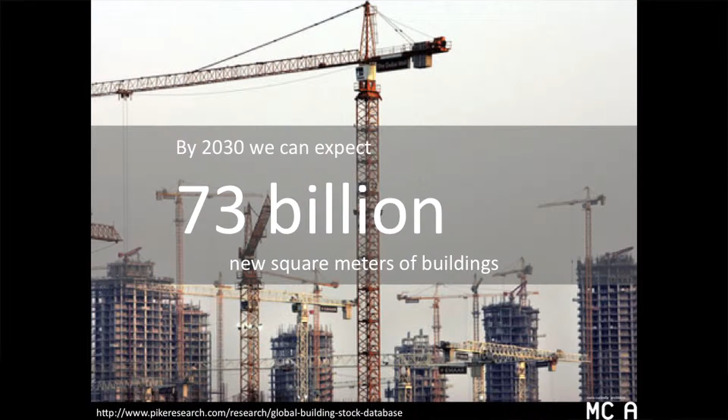But the most important thing is that by 2030, we can expect another 73 billion new square meters of buildings. And these numbers are really huge. You can imagine that if we continue to build as we do today, it will be a very huge problem. We will reach the no-return point.

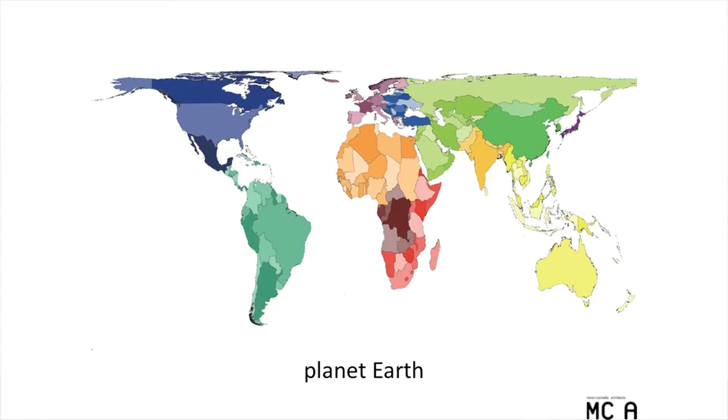So, the importance of resources. Today, there are very relevant issues, for example energy, water, waste. But tomorrow they will be extremely relevant: energy, water, biodiversity, climate, outdoor amenities. So that's the point where we start to design buildings.

So our vision is responsibility. We have to work in a responsible way to make buildings that consume a lot less energy than what we are doing today.

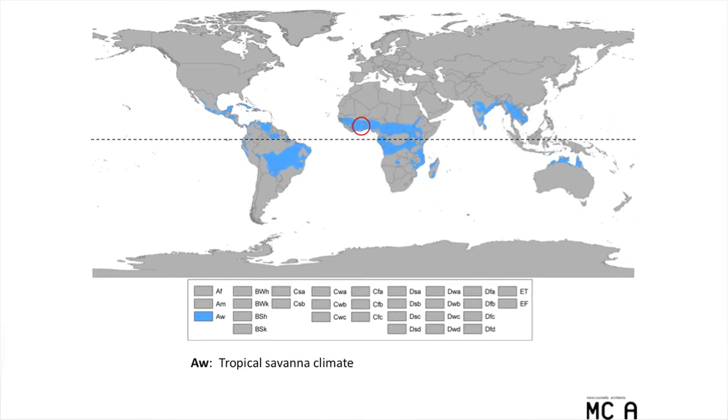This is the location. It's not very interesting, but you know, this is the solution: overhang as a passive cooling strategy.

Normally, the normal way to cool a building is to put in a lot of equipment, close the windows, and add an air conditioning system, and that's how we normally do it. But this is a very simple and easy solution.

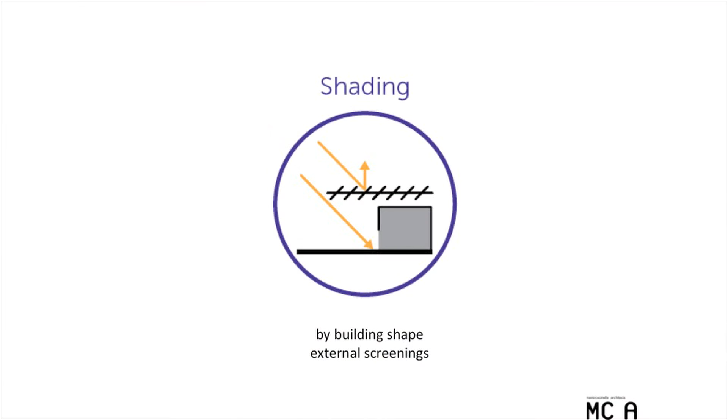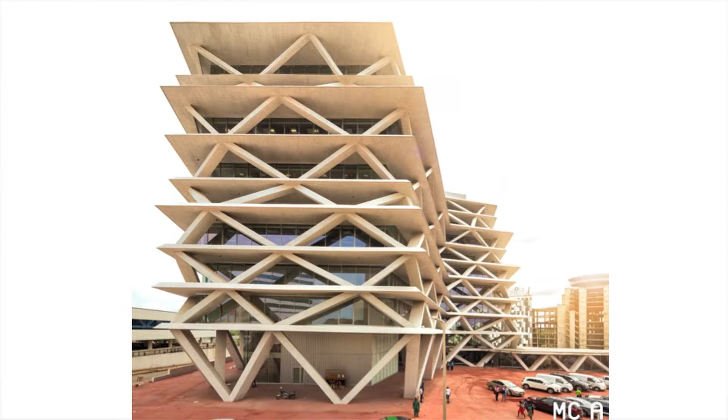This is the building. Now I will show a few pictures of it. As you can see, it's also kind of a very simple and brutal building—just floor plates and a structural diagrid. And the rest is made by the overhang system that screens the facade from the sun.

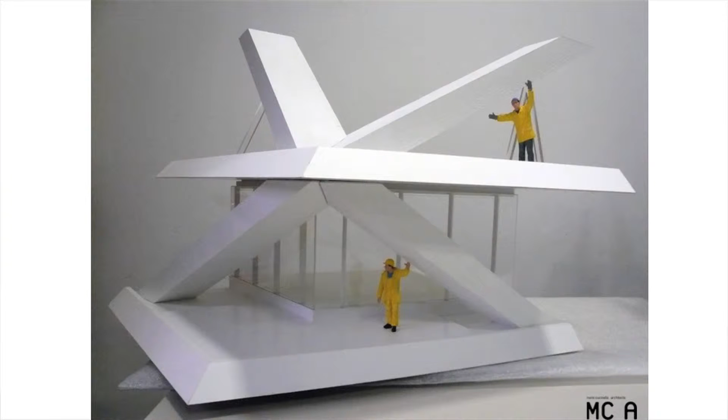And this will reduce a lot the need for energy to refresh the building. So a very simple solution makes the building very efficient and also very beautiful, I would say.

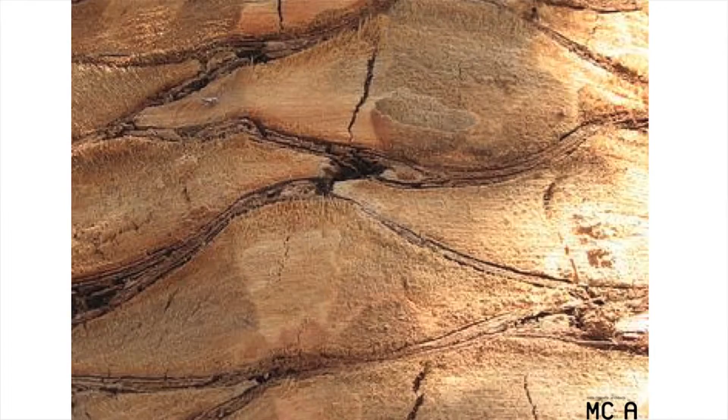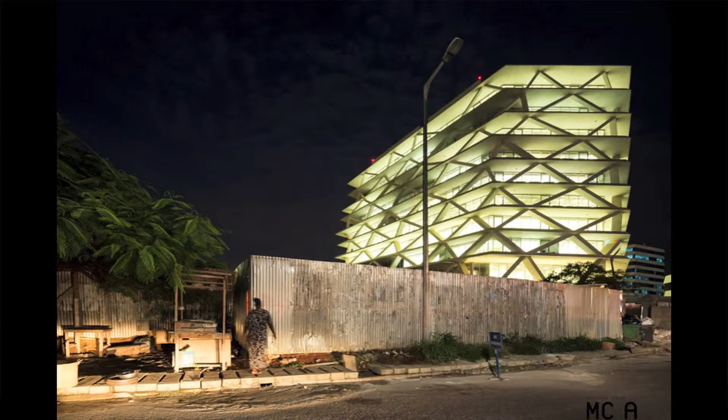So thanks to the overhangs, we can reduce the cooling peak during the day by 50%. And these pictures are just to show that with some computer program, we managed to investigate all the different problems.

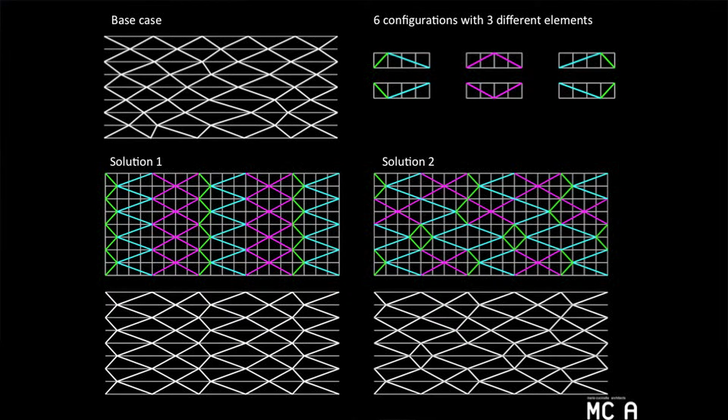This is just optimization of the structure, to minimize the use of material. So through a parametric program, we were able to minimize also the amount of concrete in the building. And it works really, really well, as you can see.

So it's a four-star Green Star certified building. That is a good result for West Africa.

Now I will move to the next project, the Algerian Post and Telecommunication Authority Headquarter in Algiers, Algeria. As always, the first issue is the climate.

Here we are in a hot summer Mediterranean climate, and the principle we used to design the building was shading. We used the tradition of the musharabia, the way Arabic countries shade the interior to keep rooms fresh even when it's very warm outside. That's the building, built starting from that principle.

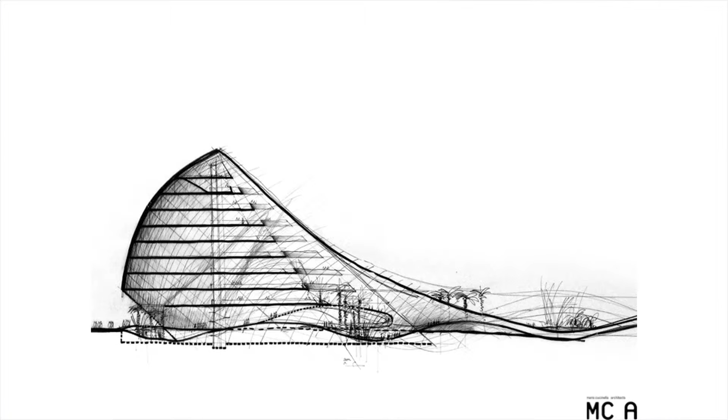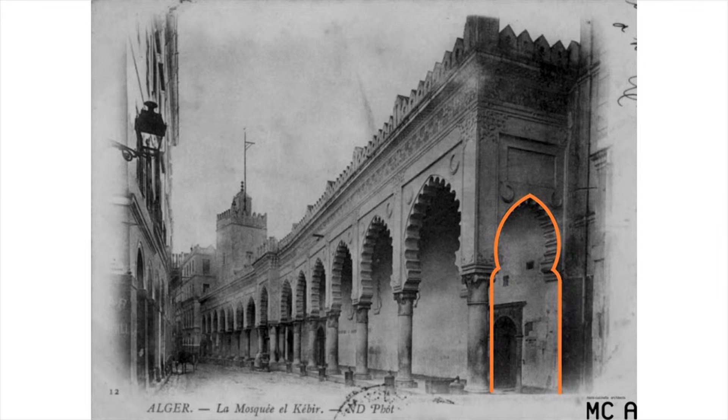In this project, apart from the shading, we also worked a lot with the shape of the building, getting inspiration from the desert dunes and from traditional Arabic arches. As you can see in the next slide, this generates the whole plan and also the facade. Everything is done using this element, which is very strong in Arabic tradition.

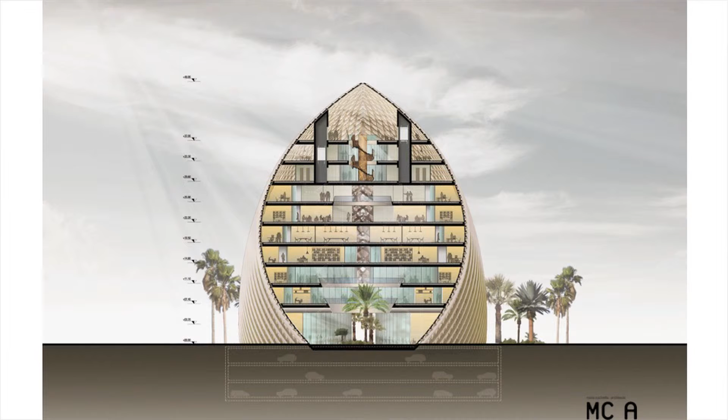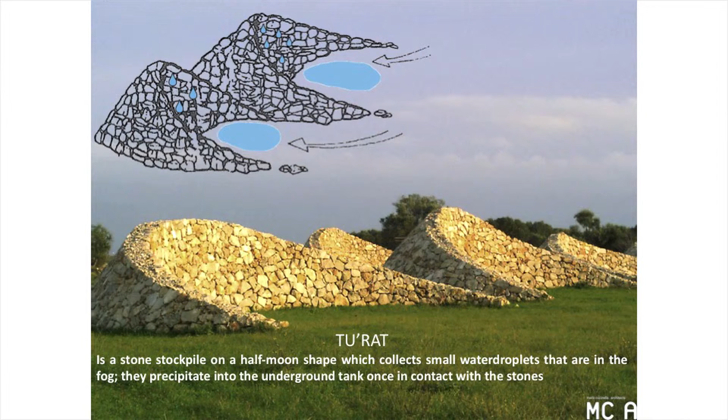This is the section, rendered. It's very interesting because the shape of the building is similar to a tu'rat, a system used in the past around the Mediterranean Sea to collect water during the night. That's exactly how our building works: during the night, cold wind reaches the building from this side, we collect the cold air, and we refresh the building overnight.

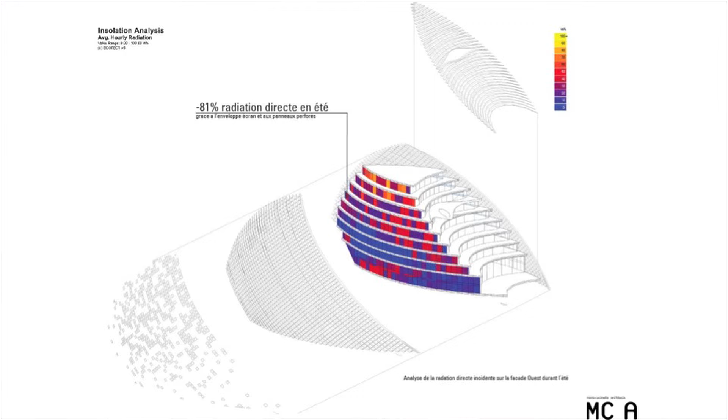There are also other strategies, but time is running fast, so I'll move on. This is the new mashrabiya screen we designed, and these are the solar radiation analyses — the screen is optimized based on the sun's position during the year, so it's not all the same but changes depending on the side of the building.

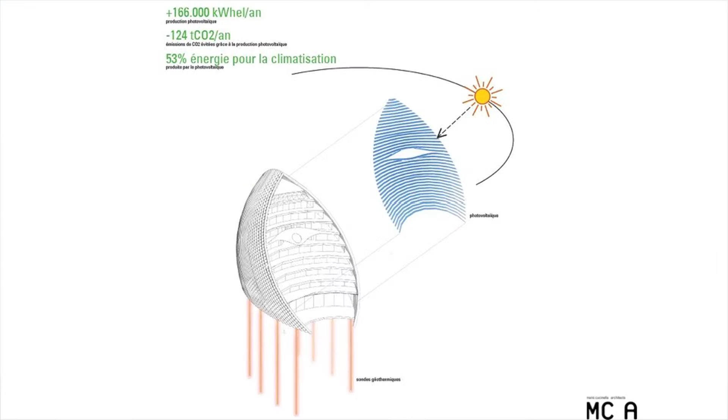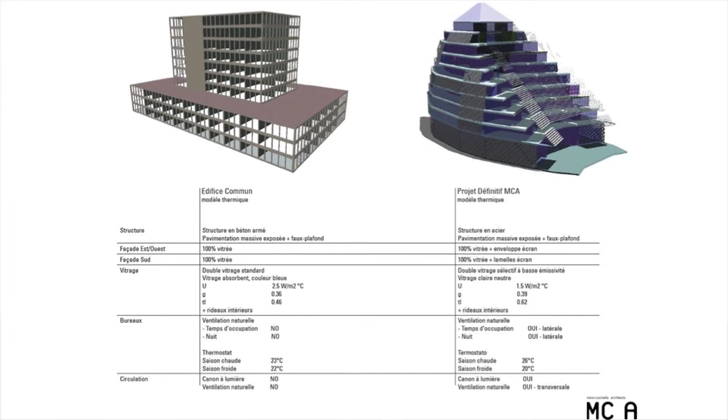We already tested this solution and it seems to be working. This is a comparison between our building and a normal office building in that area, and we found that we save 71% of the energy compared to a normal building.

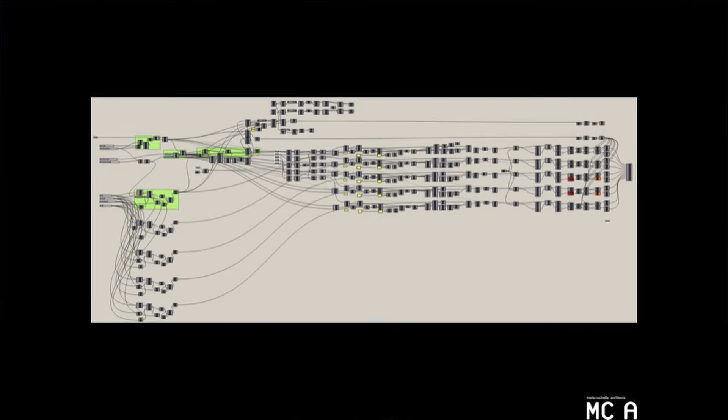This is the last project, though I've almost run out of time — but it's a very strong project I'd like to speak about. This is the Kuwait School in the Gaza Strip. It was a very difficult project because of the location and the political issues around it.

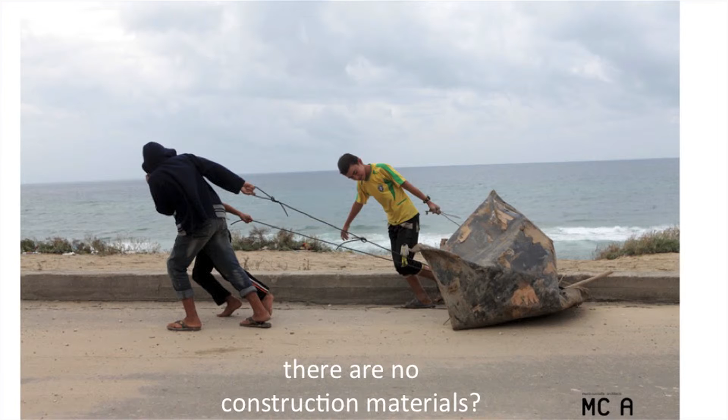Here we are in a hot semi-arid climate. Climate is always the starting point, because you cannot design a building without considering the place it's placed in. In this case we had a lot of problems: what happens if there's no water, no electricity, no construction materials? This is Gazan daily life — it's really difficult to live and to build there.

That's the situation — as you can see, it's in the Gaza Strip, a very tricky place. So how can we design a building capable of overcoming these country challenges? This is how we did it. This is the building.

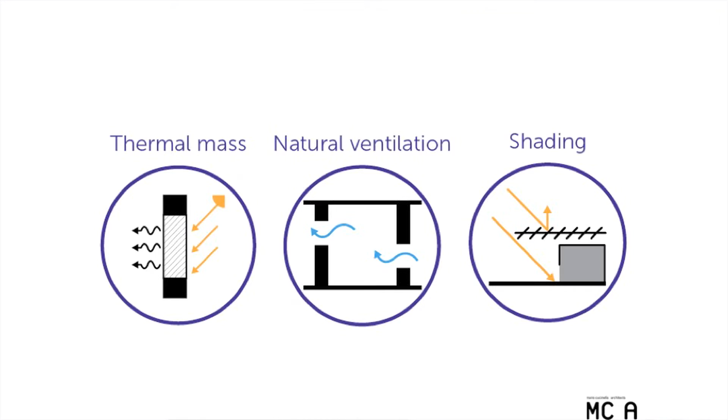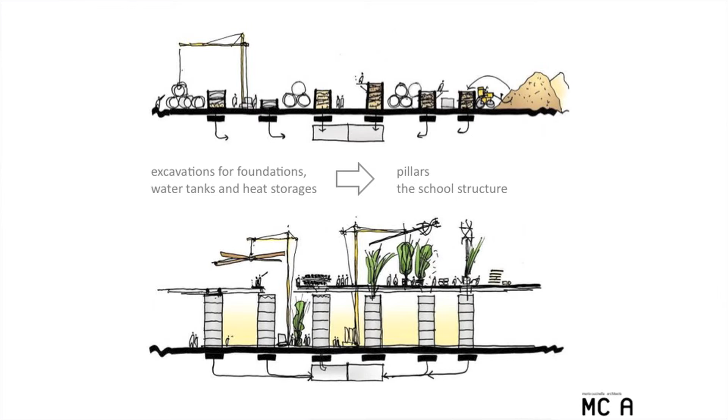We used thermal mass, natural ventilation, and shading equipment — thermal inertia. We reached that solution by filling pipes, which form the structure of the building, with earth from the work site. We simply moved earth from the ground inside these huge concrete pipes.

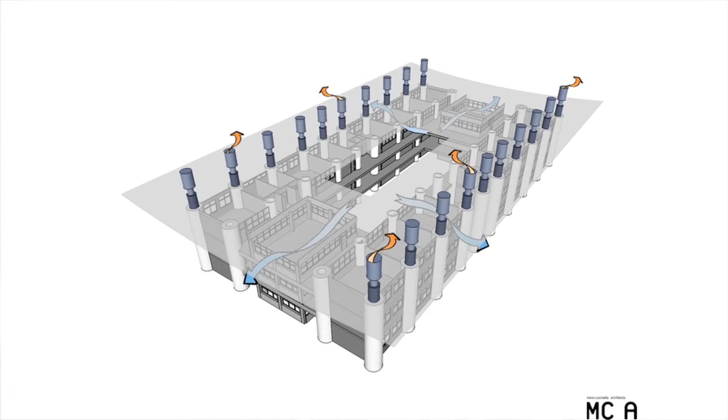Then we used wind catchers, a traditional form of natural ventilation used in the Mediterranean area and also in Asia, to make the building breathe — extracting hot air from the top and refreshing it from inside. These are simulations confirming that it works this way.

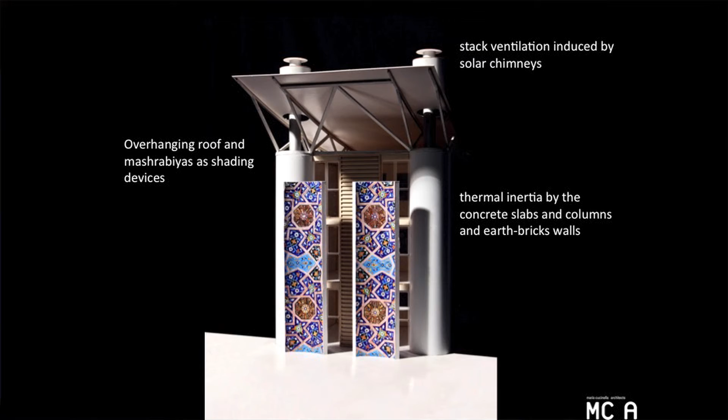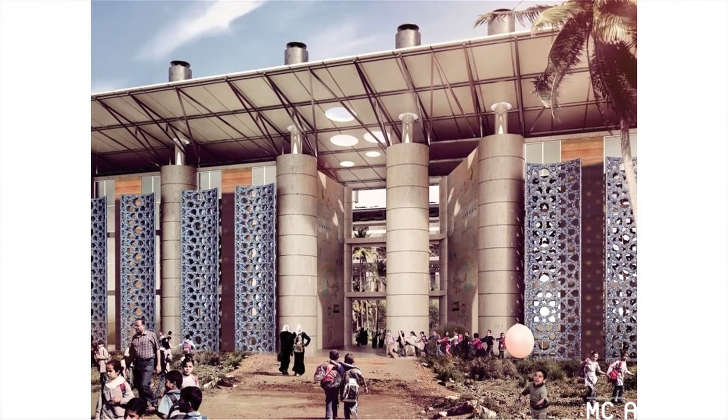This is the same mashrabiya concept — we shade the facade with this element, which combines a very nice design and works really well. That's what we get as a school, and of course it's very different from all the other schools built in that area, which are really, really bad — concrete boxes where it's almost impossible to learn, given the difficult situation.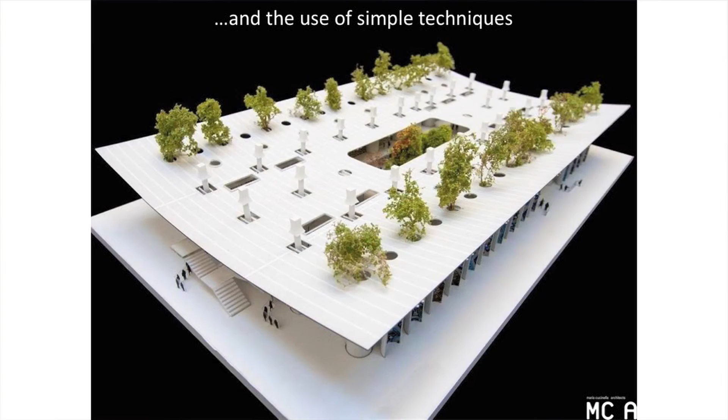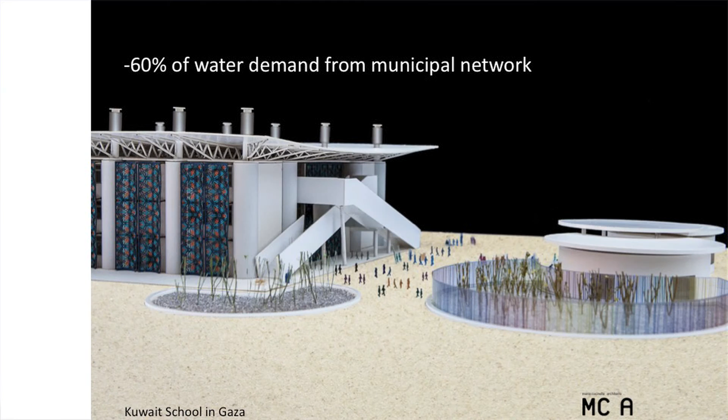This school shows that with simple techniques we can achieve a very strong building that works really well. We spared 60% of water demand, we don't use any electricity, and of course we don't use any heating system — because in Gaza, that's not a problem.

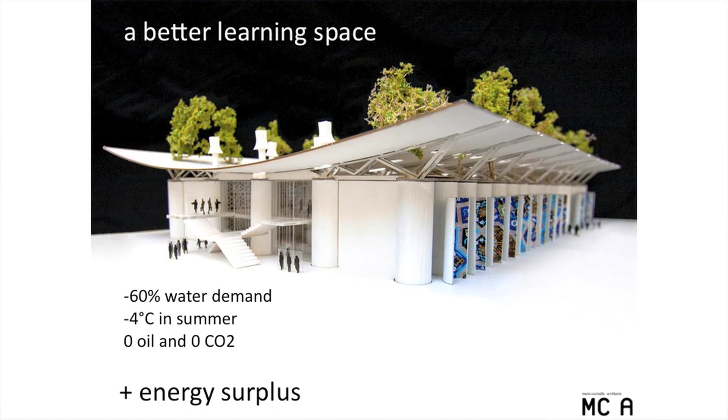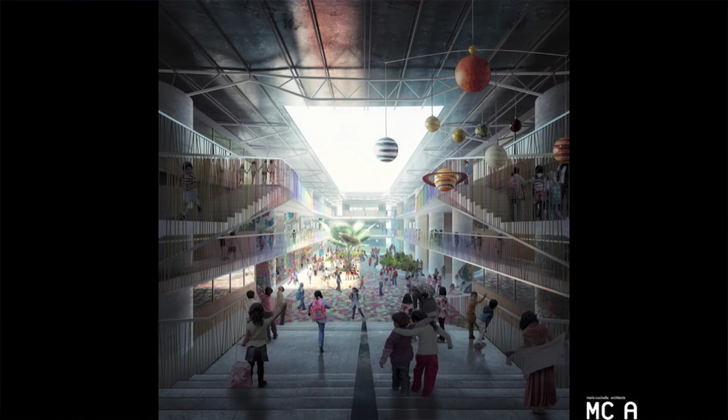During the summer, a big roof screens the facade and collects water. So we don't use any oil and we don't emit any CO2 with this building. And this is the inner court of the building.

I should show another project, but there's no time, so no problem — it's enough like this. Okay, thanks. Yeah.